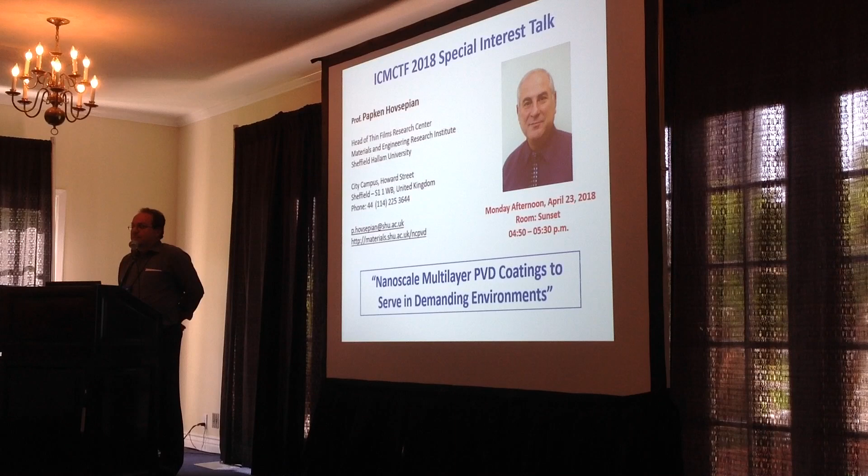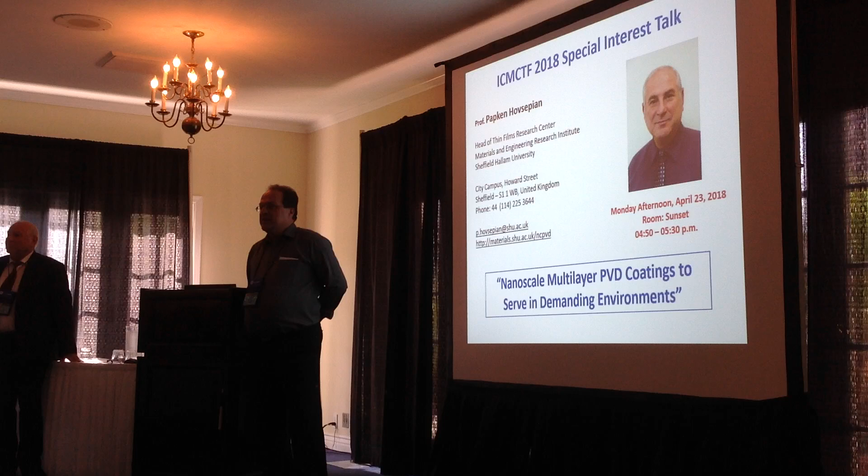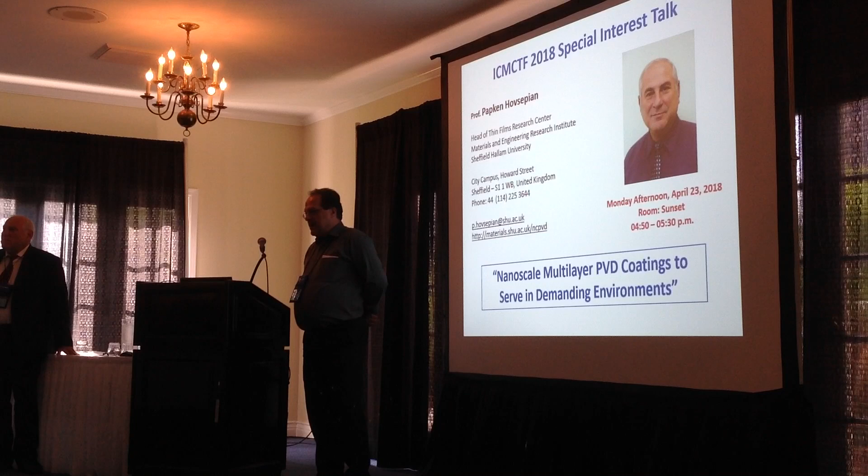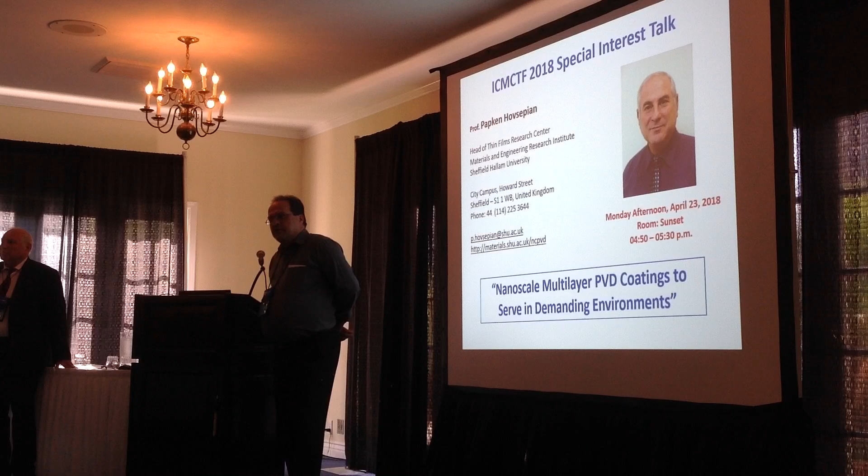It's my pleasure to welcome you to this special interest talk to be presented by Professor Papken Hovsepian. I outlined this morning a little bit in the opening ceremony about these interest talks, a new feature at ICMCTF, and you will see if you follow us throughout this week what we mean with these talks. We have a diverse approach, multiple different talks and different topics. And one aspect of these special interest talks is to highlight and recognize colleagues that have done pioneering work in fields of interest to ICMCTF, who have done outstanding service to ICMCTF and have had an impact on our research community. And this holds absolutely true for Papken Hovsepian.

Papken is truly a pioneer in physical vapor deposition. He has more than 30 years experience in this field. He has done significant work on cathodic arc evaporation, on magnetron sputtering. A special interest of his work was always the development of hybrid deposition processes, combining the different methods. And I would say, in a personal estimation, his impact on the work on the pulsed deposition processes in the last 15 years, together with Harry, of course, and other colleagues, is significant, and pulsed deposition would not have reached the level it has today without it.

Papken is professor and head of the Thin Films Research Centre at the Materials and Engineering Research Institute at Sheffield Hallam University in England. And when he came in 1997 to this institution, he was very soon a foundation and solid rock on which other colleagues, and especially a hero in our field, Dieter Münz, could build on, and together these two pioneers have published seminal papers on nanoscale multilayer thin films and superlattice thin films, on transition metal nitrides and other material combinations. And if you look at these papers, you will find that already 20 years ago, these colleagues, and especially Papken, anticipated a lot of what we talk about today in interface engineering in multilayer materials.

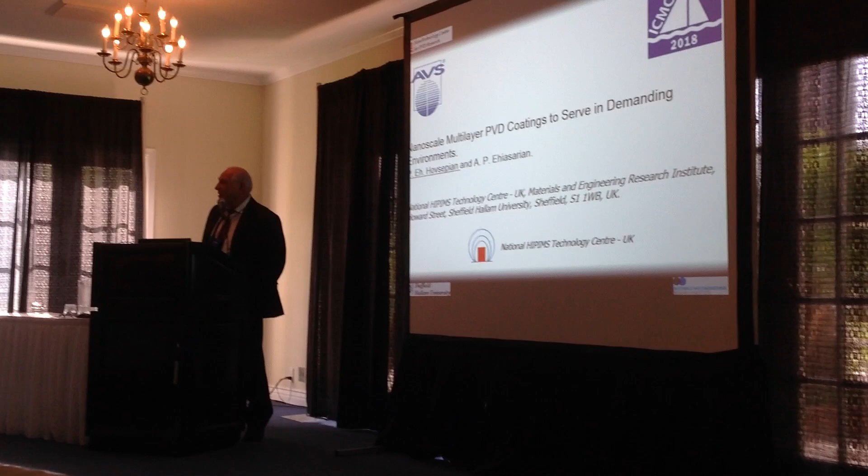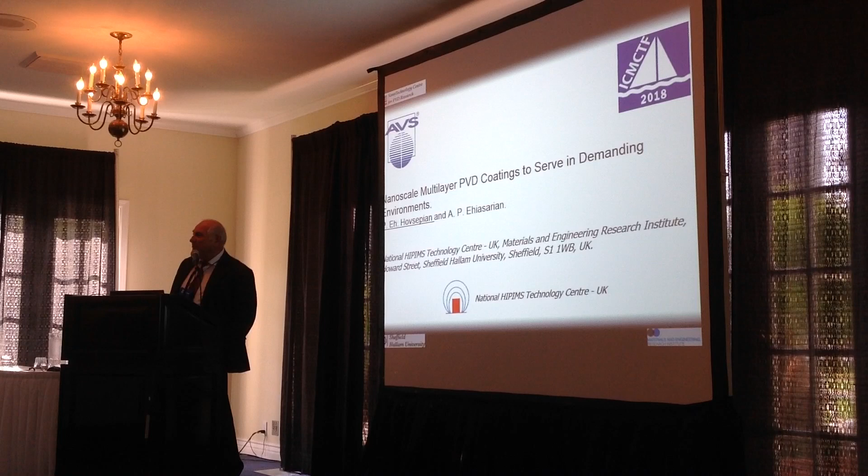I'm in the field 40 years, not 30 years. I was a student when I started with my PhD, and for some reason it stayed with me all my life. So it is true that I always worked in the field of applied research, and I'm not ashamed of that. I like seeing results being implemented in industry. And what I will do, I will try in the next 40 minutes to keep you, of course, entertained, but also to show you the pain we went through to develop some of these materials, which were postulated a long time ago as super materials, and the results which we have achieved in this field.

So the title already says that these are coatings which will work in demanding environments, and the environments which I will touch include wet corrosion, room and high temperature oxidation and corrosion resistance, interaction with workpiece materials during cutting, and interaction with the human body. So it's a very wide range of environments, and one has to have a specific approach.

And the approach we followed during this research for all these years was always the following. We would start first with careful investigation of the application itself. So it's paramount, it's very important that you understand the application, and then you start designing and using different approaches for how to handle this application.

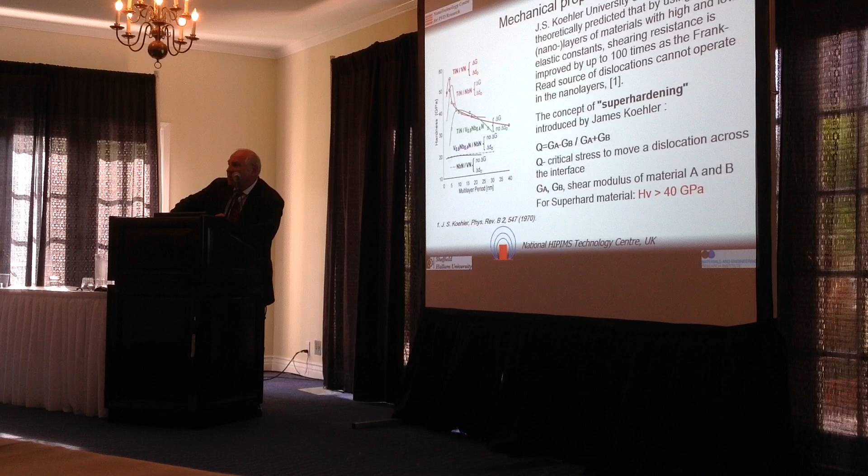Around 1970, I think James Koehler was the first person who introduced the theory behind the super lattices. And the theory was that if you marry two materials with different elastic constants, then you automatically create a barrier for the dislocation motion, and the energy they need to cross this barrier is proportional to the difference between the elastic moduli.

So it was a really interesting concept, because this gave in our hands a tool to manufacture man-made new materials. And it was demonstrated that a huge hardness enhancement can be achieved in a specific bilayer period range.

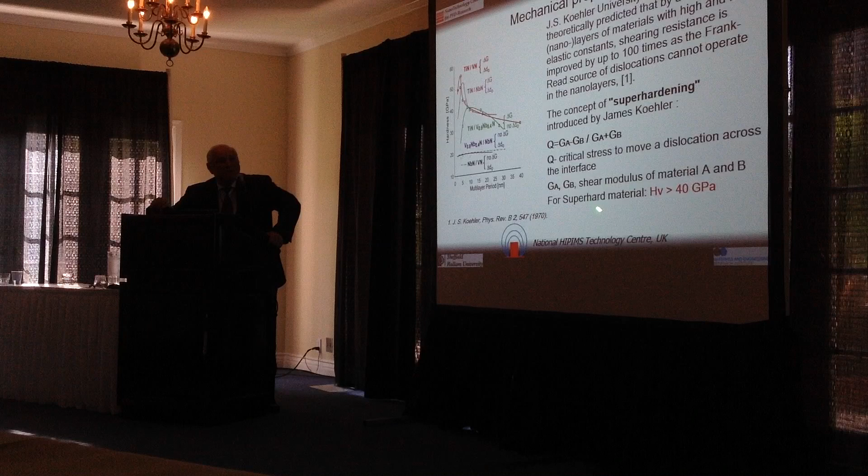Now this was the attraction for many years, and the goal was always to get harder and harder materials. The super hardness as a term was introduced, and everything which is harder than 40 gigapascal was named super hard.

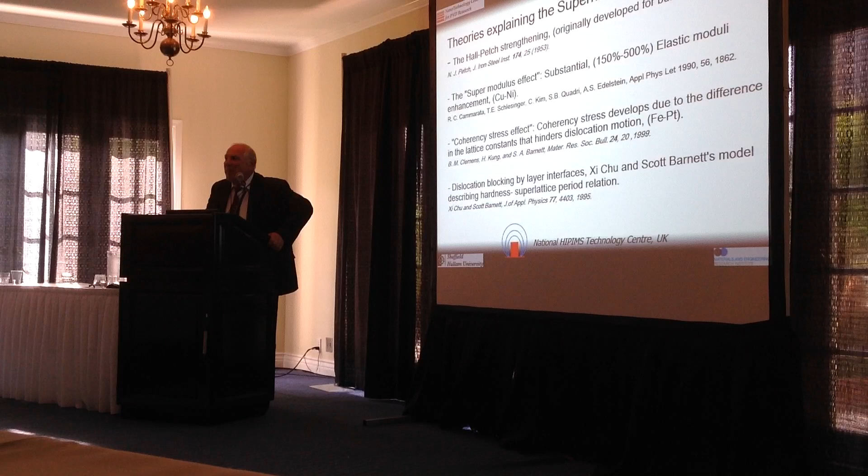Now the theories which explain this, and there was a huge amount of research which I'm not going to touch deeply, but I selected just 4 very comprehensive theories which explain the hardening effect, starting with the Hall-Petch, which we all know, which was developed for bulk materials, but it can somehow apply in condensed materials as well, on vapor phase.

Supermodulus effect was the next attempt to explain the hardening by claiming that you can have sometimes between 100%, 150% to 500% increase of the modulus, elastic modulus, and therefore you can get hardness enhancement. The coherency stress effect was based on the fact that if you have two materials with different crystallographic structures, then you automatically create a barrier for dislocation motion, and therefore hardening effect.

But the theory which I really all these years liked most was the one which was proposed by Chu and Barnett, and they were saying that depending on the thickness of the individual layers, you can have three cases: very thin layers where you cannot develop dislocations at all,

so therefore your hardness is low; very thick layers where the material just behaves like an ordinary multilayer material, and a specific range of bilayer thicknesses where the dislocations will be generated in the softer material, but they will not be able to jump in the harder material, and therefore you get hardening effect.

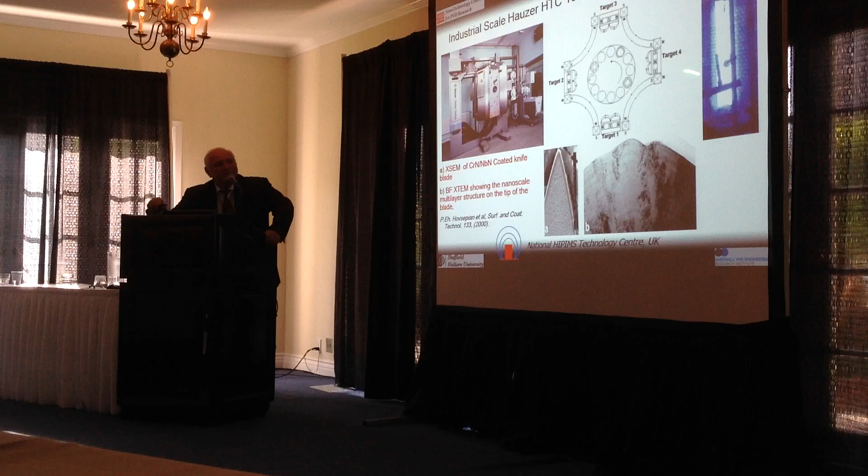And to deposit such materials, you need specialized equipment. This is a picture of a Hauzer machine, which we have in our center. It has 4 sources, plasma sources. And if you furnish these 2 sources with one material and these 2 sources with another material, simply by sequential exposure of the surfaces by rotation to the fluxes coming from these 2 pairs of magnetrons, you end up with the layer structure.

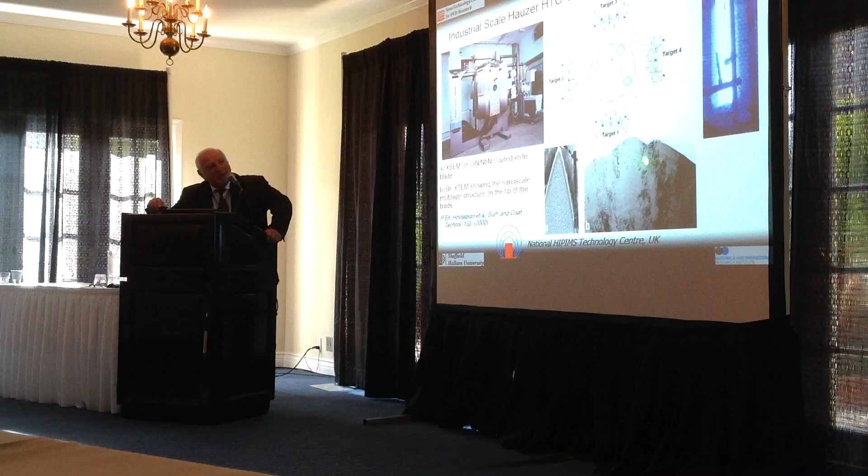In 2000, we were basically forced by industry to demonstrate that we can deposit with high precision these fine multilayer structures on 3-dimensional components. And this shows you a SEM cross-section of a scalpel blade coated with a coating, and in TEM you can clearly see, I hope you can see them, the light could be very different for you, but you can see the layer structure. So it was clear that we can put these coatings on a cutting tool, on a turbine blade, or whatever 3-dimensional component with very high accuracy.

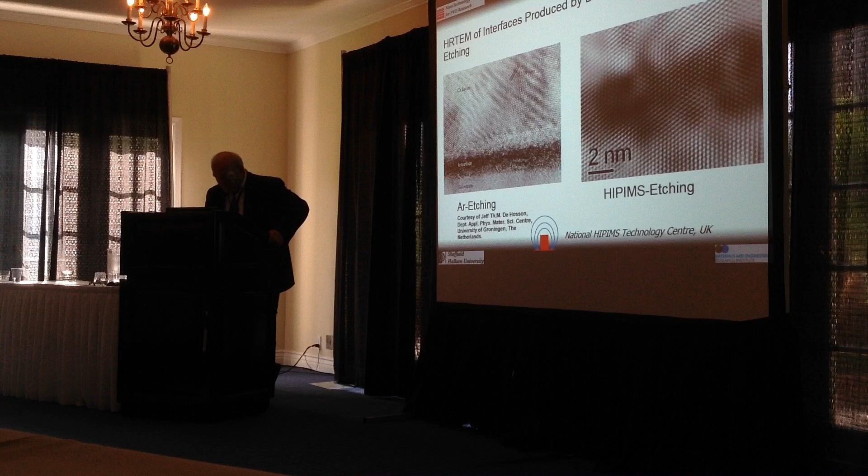This type of crystallographically perfect interfaces produced by implantation trigger afterwards during the coating growth stage, local epitaxial growth. We were practicing metal ion etching with arc for many years, but the difference which we saw with HiPIMS was that we can have local epitaxial growth on very, very large areas of the substrate.

Also taking into account that arc generates droplets, and if you take the time and calculate how much of the surface is actually covered by droplets when you use arc evaporation for pretreatment, I will give you just one example. For titanium, it's approximately 19%. These droplets are not metallurgically bonded to the substrate. They arrive here, they solidify, there's no bonding. So 19% of your surface is out from contributing to the adhesion strength. So therefore, there is no wonder that the adhesion of HiPIMS pre-treated surfaces and coatings is higher than the one produced by arc. In both cases, we have metal ion etching. In both cases, we have local epitaxial growth, but here we have lower adhesion than using HiPIMS.

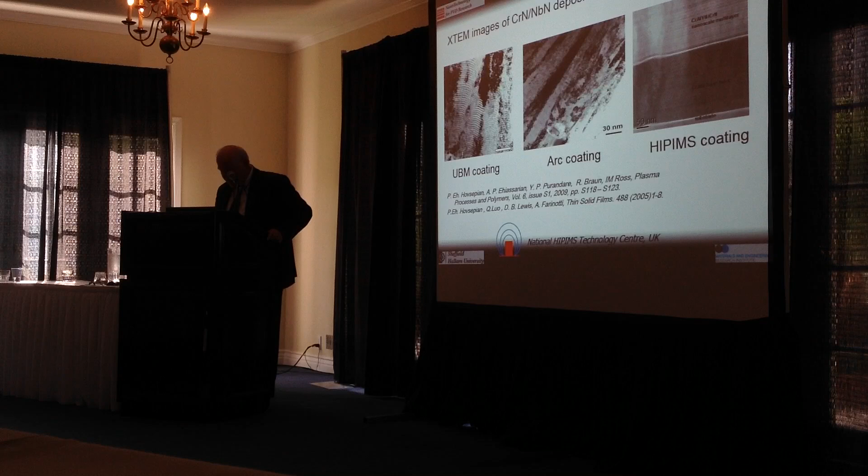Now, if you go further and investigate the coating density, this is just an example. Nobody is depositing in real life magnetron sputtered coating with zero bias. I used this picture just to show the danger of having open structures and to contrast it to what we see with HIPIMS. This is a plan view. You make a cross section like this and observe from the top.

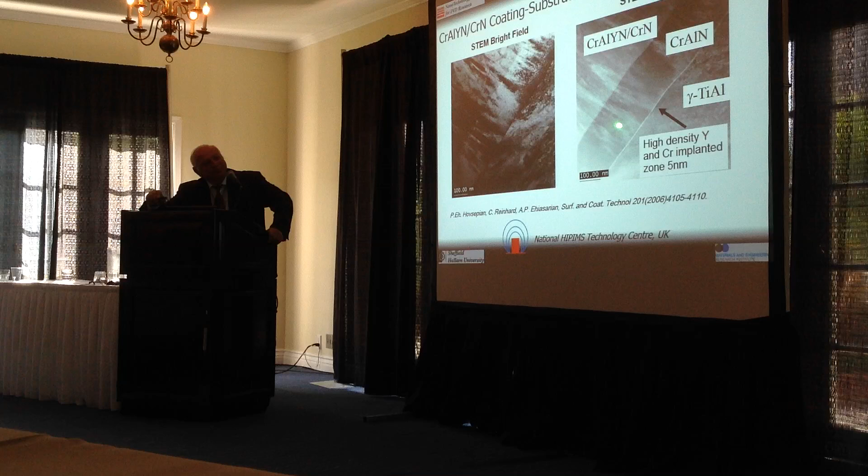So we have yttrium in the interface with this coating, and we have multilayers which are based on elements like chromium and aluminum, which produce extremely dense oxide scales. Now, this is how the coating looks like. You have your base layer, the implanted zone, the base layer, and the coating.

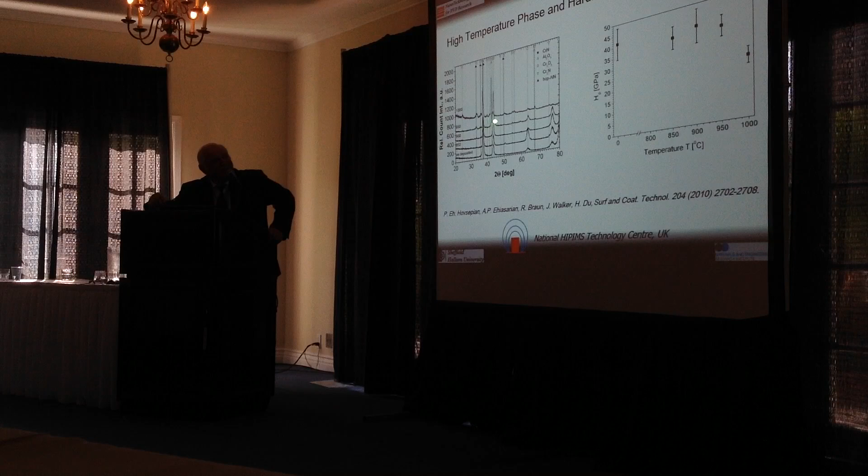Very interesting properties. We saw the first sign and signature of oxidation after 850 degrees C. Hardness was retained up to 900, very high hardness. Very interesting tribological performance. With temperature, the friction coefficient in high temperature tribological tests was reducing. This is very well understood because the oxides which form based on chromium are so-called Magnéli type of oxides, so they have low shear stress planes, and therefore the friction coefficient is reducing because you produce these lubricious oxides.

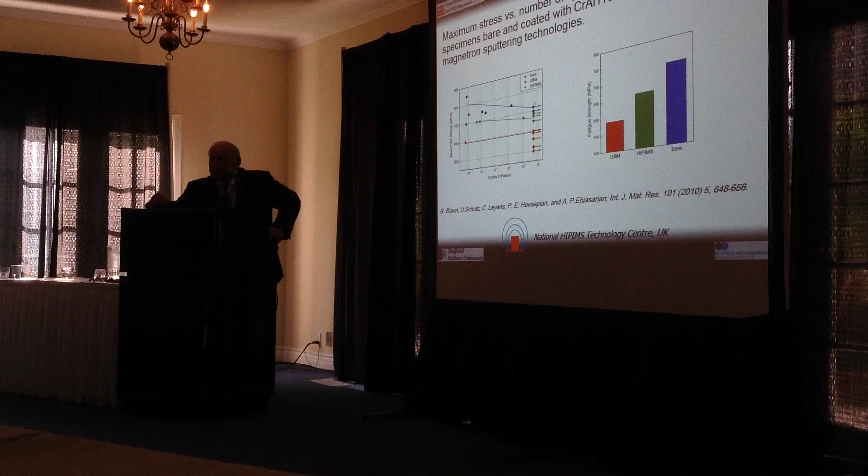What we found with this coating after fatigue tests: this is the fatigue strength of the uncoated material. This is the fatigue deficit when you use unbalanced magnetron sputtering and porous coating, and HIPIMS was producing only approximately 9% fatigue deficit, which was accepted by the aero industry. So we coated within this project several types of blades.

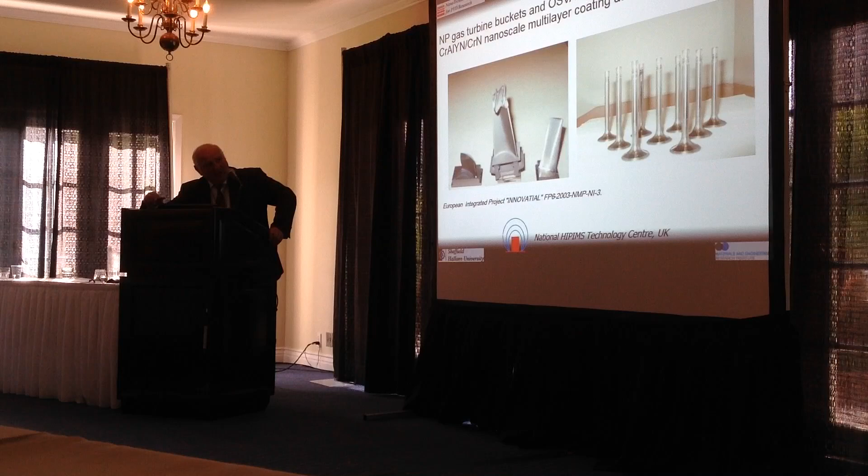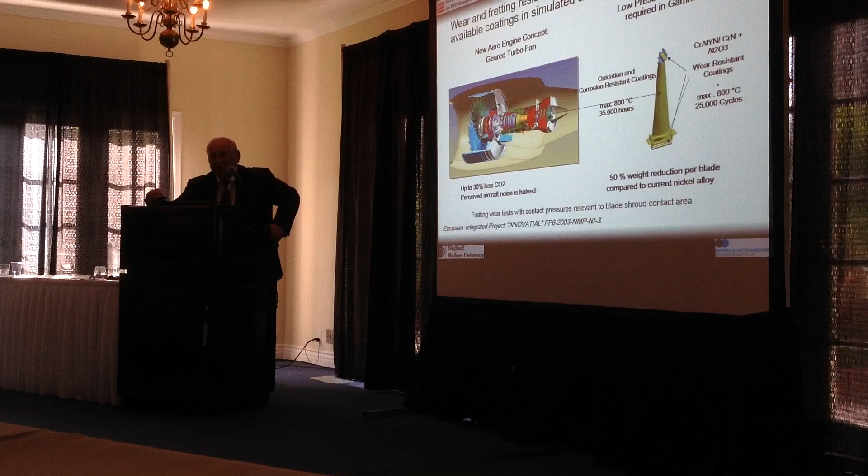We also translated the coating for automotive components. And the coating was tested by MTU at that time. It was a very special cooperation between ourselves and Hauzer, because the final coating, which really performed, was a nanoscale multilayer from chromium aluminium yttrium nitride, chromium nitride, with a top coat of aluminum oxide deposited by Hauzer. So this combination did pass the test.

Next problem and next application was developing high hardness, low friction, vanadium-based nanoscale multilayers, where the strategy was to utilize Magnéli phases which form in situ at asperity contacts during sliding. You know that in tribological contact you might get up to 800 degrees C in the sliding contact.

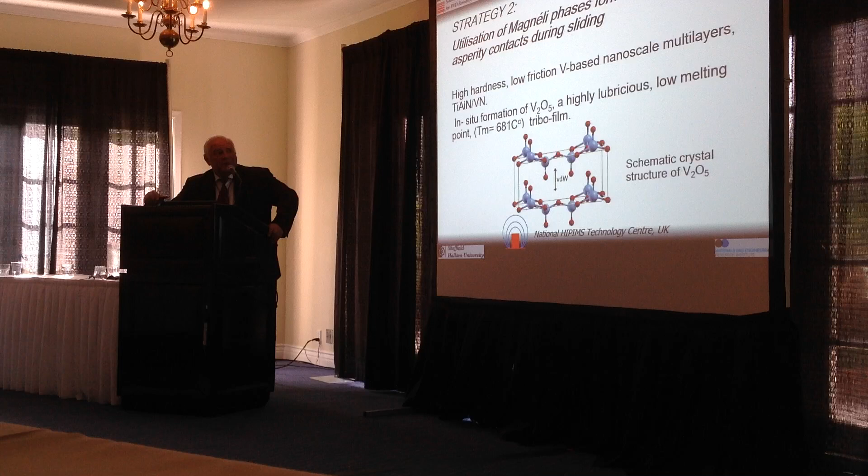So therefore, if you have material in your coating which oxidizes, and if the oxide has a Magnéli type structure like it is demonstrated here, you can really reduce the friction coefficient by producing this lubricious oxide. With vanadium pentoxide, you also have a benefit of having a very low melting point.

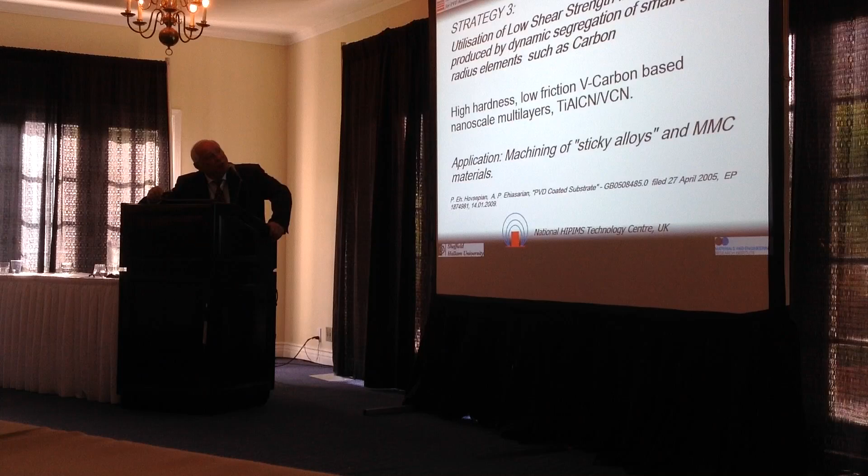With the next step, we modified this material by bringing carbon in it, and the strategy here was to utilize low shear strength interfaces, which are produced by dynamic segregation of small atomic radius elements such as carbon. So if you go to the literature generated before the 90s, where people were very active developing theories about superlattices, you will always find the same claim. The interfaces must be sharp.

It was just Scott Barnett who published a really nice paper saying, okay, but whatever we do, we have at least 1 nanometer intermixing. And then, knowing about these things, we said perhaps something can be pushed into this area of the coating, right at the interface between the individual layers, and change the whole wear mechanism of this coating. And this type of coating was under our radar because we wanted to machine sticky alloys, which produce huge build-up layers.

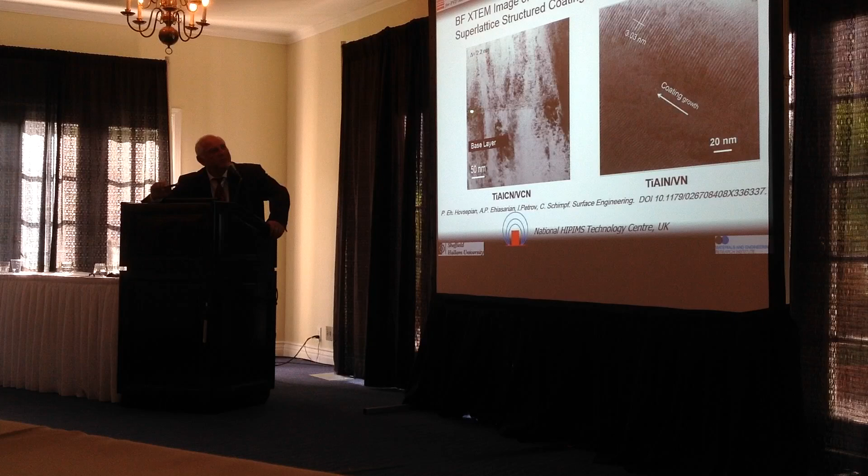And here's what happens. If you add carbon to the titanium nitride or vanadium nitride, it does segregate right at the interfaces. You see this is a carbon-free coating, and this is a coating which has carbon. And this is carbon. We have published this, we have studied this very carefully, so I have no time to show you all these results. But carbon is segregating at the interfaces. In machining of aluminum alloys, we saw that we can outperform the carbon-free version of the vanadium type of superlattice coating. We were much better than DLC.

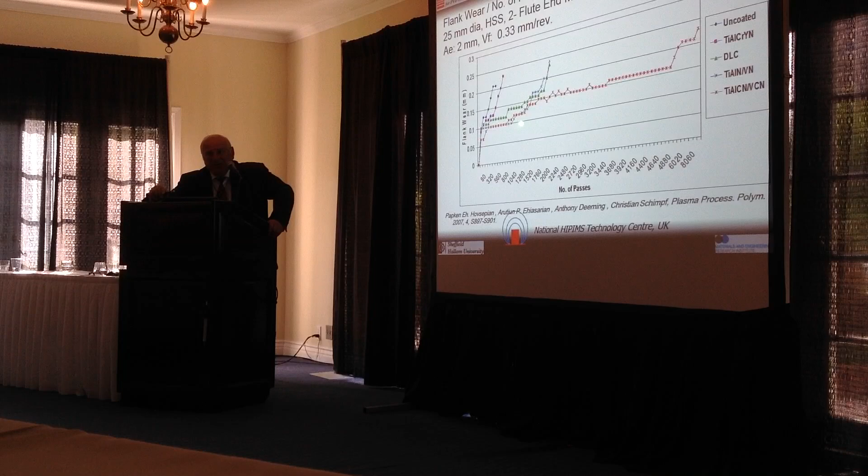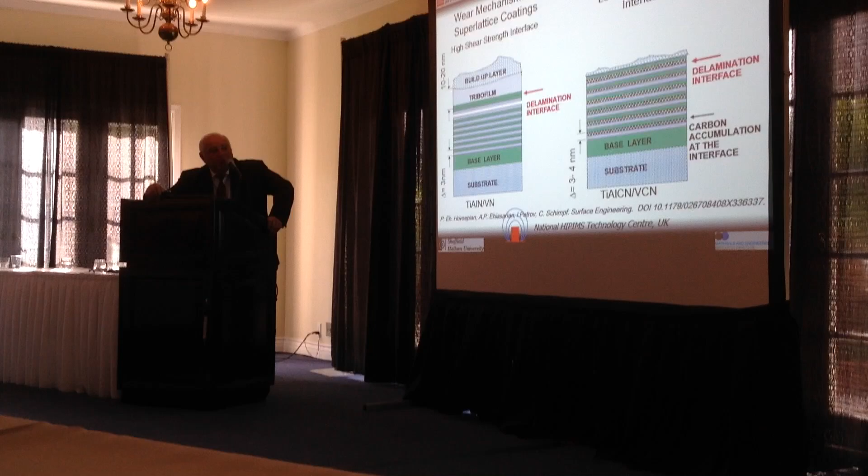When carbon is segregated in the interfaces, you are in a layer by layer wear mechanism, and this layer by layer wear mechanism is on the nanoscale. So therefore, with this approach, you don't actually prevent the metallurgical reaction, because you cannot cheat nature. But you can produce a material which has a special tribological behavior.

And applications are clear. We were in a project with Fiat at that time. They wanted to machine lots of aluminum: cutting, drilling, tapping for automotive components. Airbus wanted to machine airplane wings, and this is basically machining of aluminum 7010. Huge blocks of aluminum will be reduced to a very, very fine structure like this, lightweight.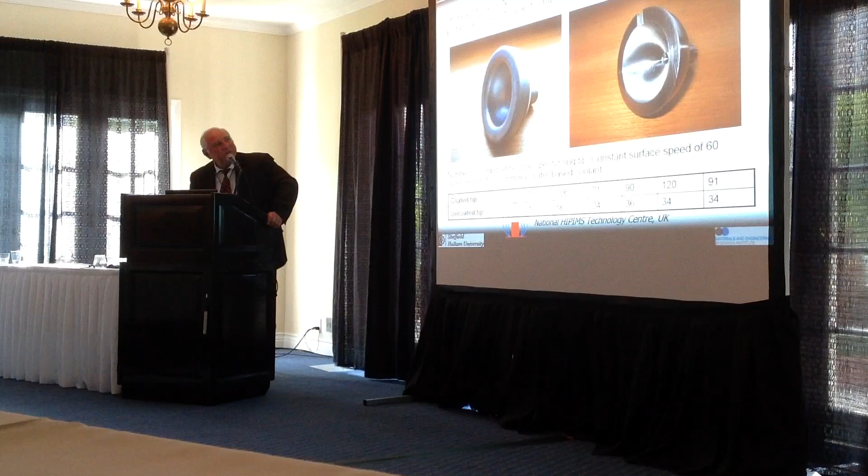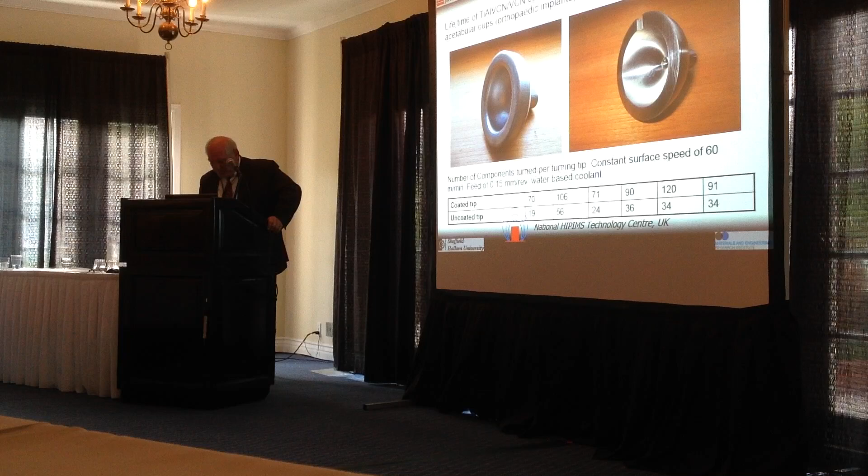But we were also very good in machining titanium alloys. And this is a case where we show that we can improve the lifetime of our tool by almost a factor of 3, by machining 3 times more components for medical implants. So we cannot explain these results by saying, okay, our coating is inert, because if it is inert to aluminum, it definitely reacts with titanium. This coating has a different wear mechanism.

The fourth strategy and the fifth strategy, which I will explain, are around metal-doped carbon films. And here we wanted to use the high ion irradiation to achieve a very special growth, which is based on self-organized nanostructures and dynamic phase separation. So metal-doped carbon films have been introduced and patented by Dennis Teer. What we wanted is to find ways to get new properties, a new type of performance, based on the tools which we have in our hands, and this was the ion irradiation, just using different bias voltages.

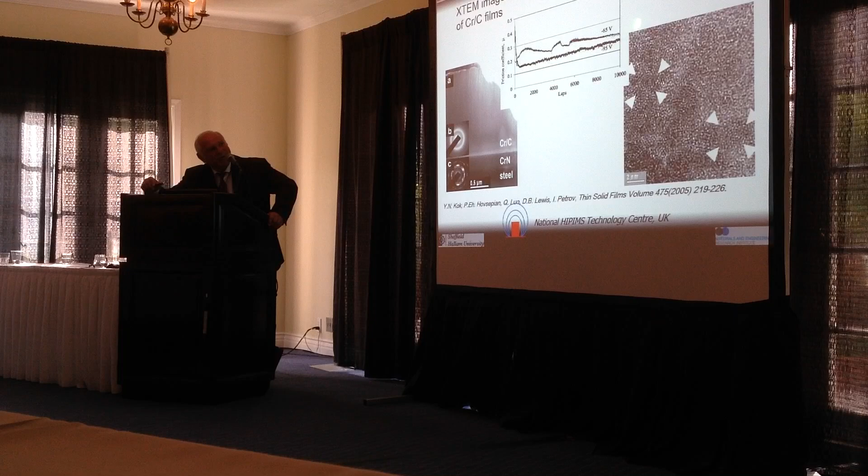And Raman shows you that with increasing bias voltage, you start changing from the typical graphite type of Raman spectra to more carbide type of Raman spectra. And the most intriguing thing was that when we moved to the high bias voltage range, we suddenly found a material which is perfectly layered, and the bilayer thickness was certainly not corresponding to the rotation speed and the power which we use on the magnetrons, because it was abnormally large. It was 20 to 30 nanometers.

We found these very special structures, onion-like structures, and with time we did lots of analysis to show that this is actually almost pure carbon. They were 95% carbon. And you can clearly see that it is ion bombardment related growth, because if you increase the bias voltage from 350 to 450, you get a different bilayer thickness. And you can destroy this growth if you go to very high bias voltages. So that was a very interesting growth based on carbon segregation.

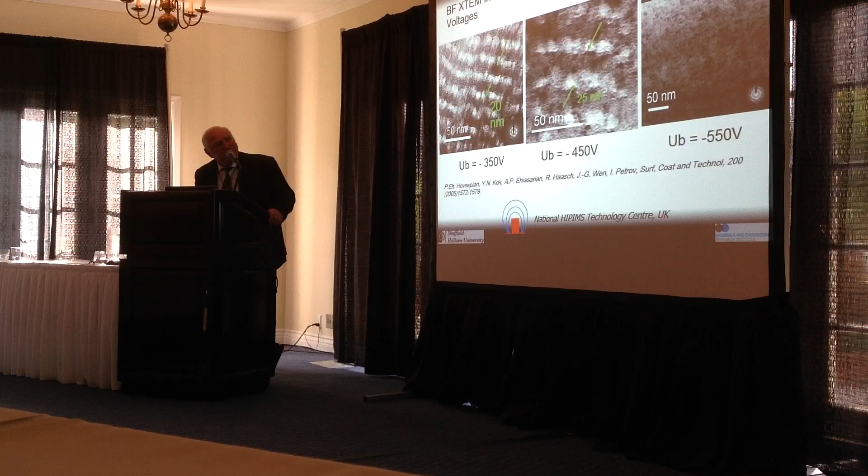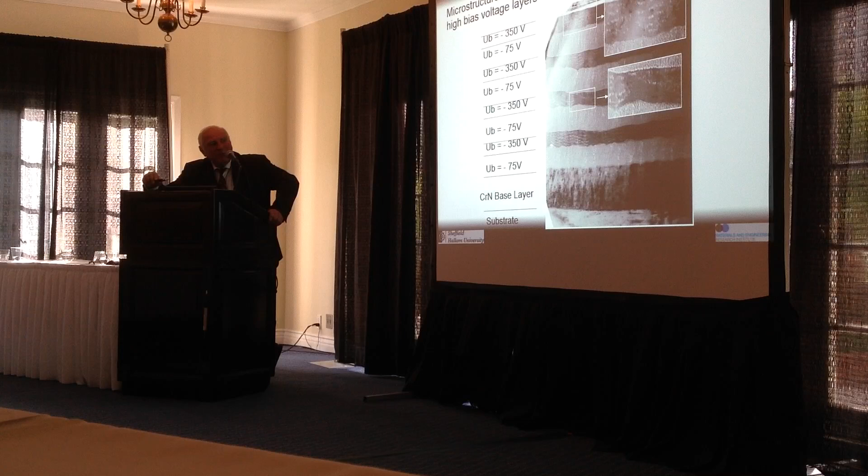And you can actually show very clearly it's based on the irradiation effects, because this sample was produced in one deposition run. For half an hour the coating was deposited at 75, in the next half an hour at 350. You reverse it to 75 and you reverse this structure. It is very reproducible. You can see all the signatures of the ion bombardment. Low ion bombardment, you can see the tops of the columns, very rough surface. High ion bombardment, this is the end of the cycle, very smooth surface because of the resputtering. And you can clearly see that you can just switch from amorphous to this layered structure absolutely accurately.

The application was coatings on, I will call them, fine blades. This is just the cutting edge. This is a cross section, very high aspect ratio, very sharp blades, which reduce the cutting forces and improve the lifetime of the blade.

Strategy 5, again, metal-doped carbon films, where we wanted to utilize the thermochemical reactions to achieve in situ formation of lubricious phases in conditions of boundary lubrication. The application was low friction, highly wear resistant tribological coatings, which need to operate at boundary lubricated conditions, but at elevated temperatures. It's a coating where we doped carbon with molybdenum and tungsten. I think we patented this solution. This is the typical structure of such a coating.

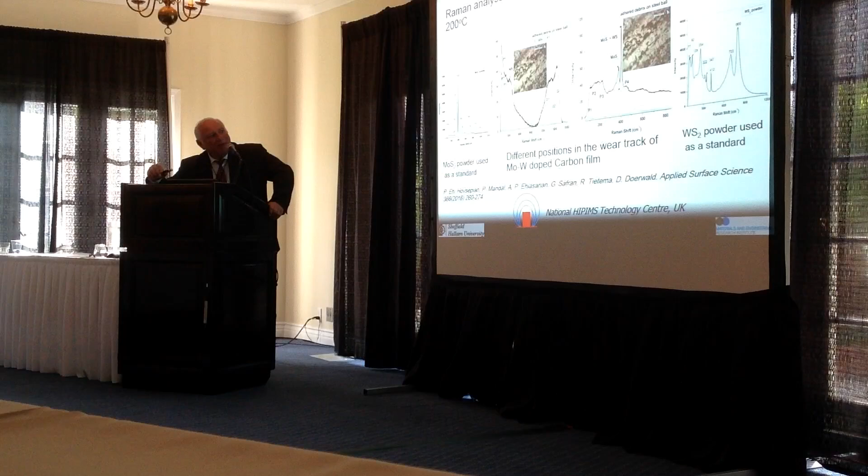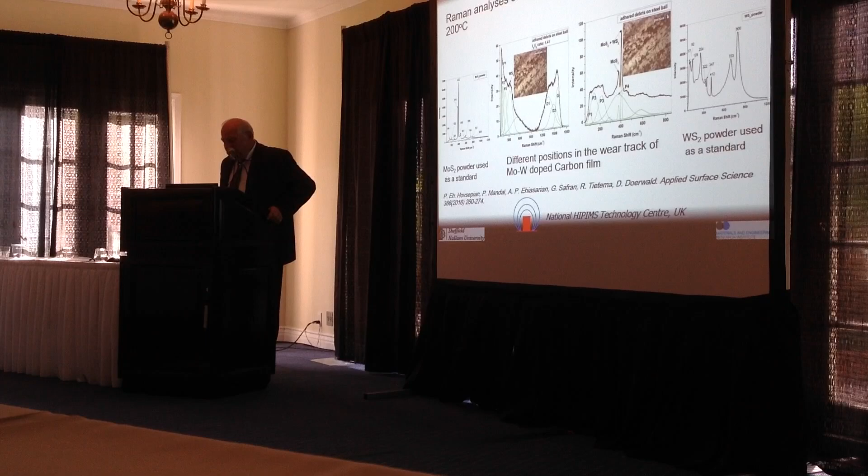The formation of the MoS2 and WS2 in situ was confirmed by careful analysis of the wear debris after the lubricated test at 200 degrees C. And you can see the spectra here of the wear debris. And here, these are the spectra of these two compounds in pure powder condition. We can clearly see that these lines correspond exactly to the powders which we used as control specimens.

What was the big difference between the behavior of these coatings and the standard DLCs was their friction behavior with time. The standard DLC initially had a very low friction coefficient, but with time it started increasing because at these high temperatures you start getting relaxation, and the friction behavior deteriorates, whereas with the molybdenum tungsten doped carbon films, the friction behavior is completely different. The friction coefficient does reduce because you generate more and more of this lubricious phase with time.

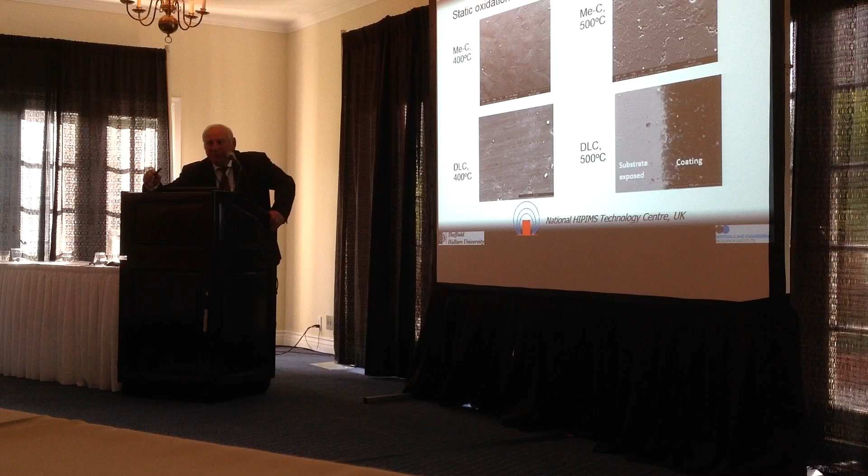Applications here. I just wanted to show this. Also, in the test at 500 degrees C the standard DLC coating is almost evaporated here, and this coating is still intact. So the goal was to produce a coating which withstands high temperatures. And this is the demand from the automotive industry because of the increasing loads and the reduced size of the components. So the load conditions are really very demanding, and you really need this type of coatings if you want to deliver in this application. That is just to show how some components with these coatings look.

And I'm with the last strategy, where we used highly electrochemically stable metals like niobium combined with chromium as a wear-resistant material to produce a wear-resistant and electrochemically stable, corrosion-resistant coating. So this work was carried out in an attempt to replace hard chrome. So this was the idea. And we have three very interesting applications with this coating.

Corrosion and wear resistance in wet corrosion applications, a corrosion and wear resistant coating which protects components in steam turbines, so this is another demanding application, and as a coating for medical implants. It was easy to demonstrate that the potentiodynamic polarization behavior of this coating is much better than stainless steel.

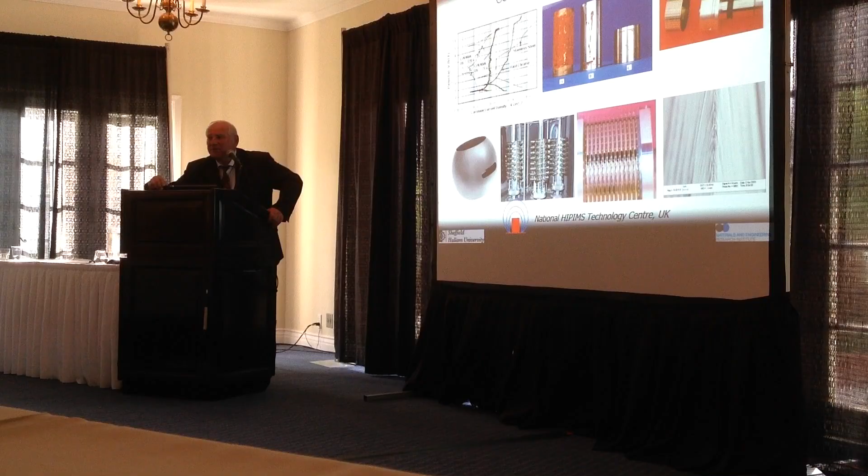So this coating went to several applications. These are components for textile machines. These are components from the automotive industry. This is a ball valve which is used in the petrochemical industry. Deposited coatings of this type improve the lifetime in all these applications.

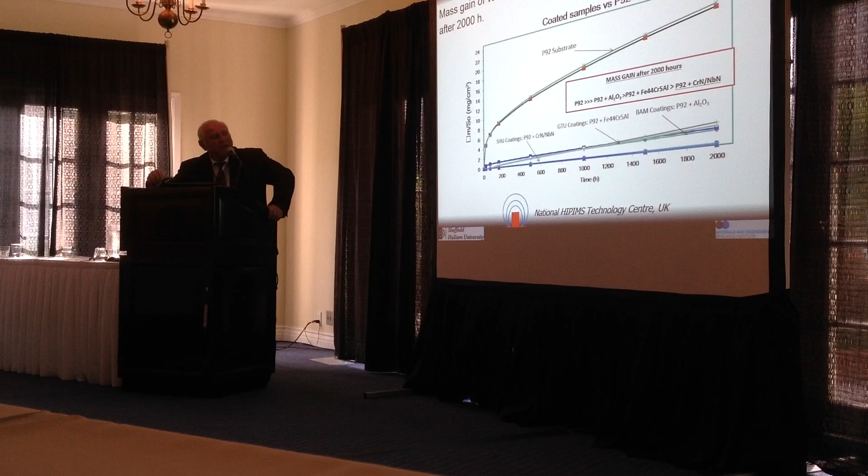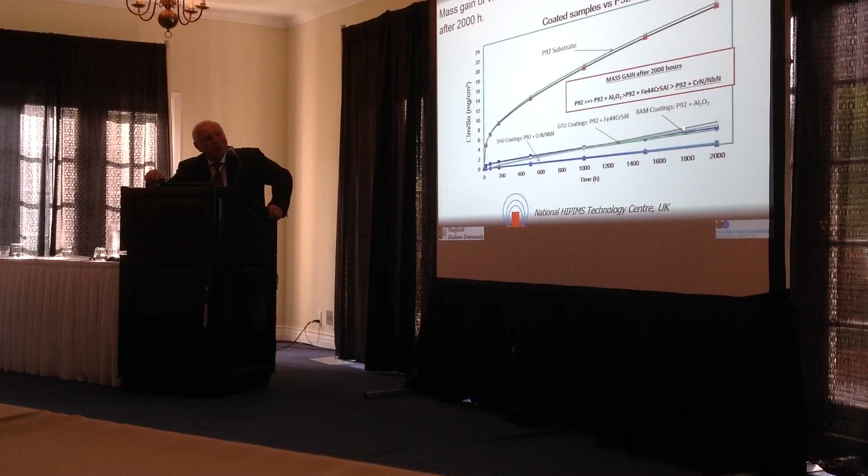Steam turbines, very aggressive atmosphere. This is just a picture which I drew from the internet just to show how terrible this surface looks. But when the coating is deposited on the turbine steel, this is the weight gain with our coating. This is the weight gain of the P92 substrate without protection. And these are coatings, actually this one is an 80 micron thick coating, which is a very complicated alloy. And this is a coating produced by BAM, which is an oxide layer, so we were surprised that we can actually outperform this type of materials with our coating.

We started looking much closer at what we do to the substrate when we deposit coatings. So it's a high temperature tensile strength test where we saw that actually the tensile strength of our specimen was improved after depositing this coating rather than deteriorated.

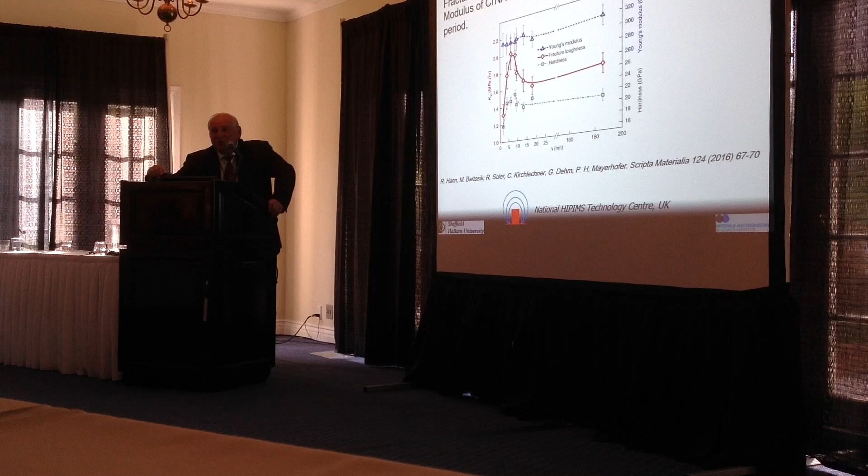And finally, I would like to show you this result. When we applied this coating on implants, we passed all the tests, so the ion release was minimized to levels which were undetectable. We didn't have any attack on the cells in the human body. The test on live animals, I hear from the company with whom we work, costs several millions of dollars. It's not a secret. We work together with Zimmer Biomet, and the coating passed all these tests.